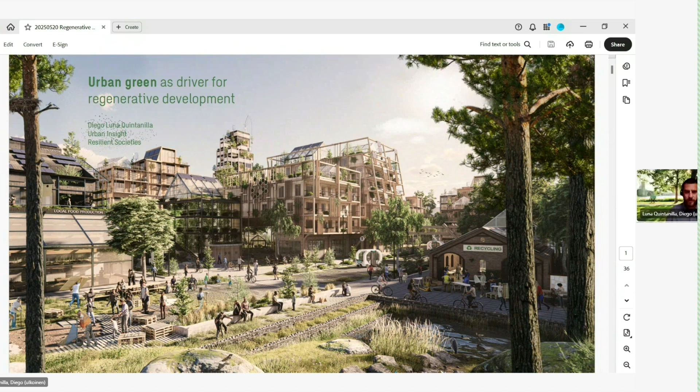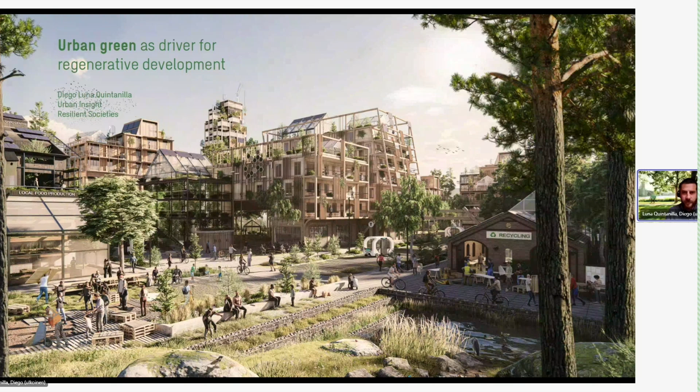Hello, thank you very much for the presentation and for the invitation. I hope that you can hear me all well. So indeed, I'm going to talk today about the role of urban green within the whole concept of regenerative development. I will switch to my presentation, just give me a second. And here I am. Can you please confirm that everything's on screen? Yeah, I guess so, so I'll start then.

I was, for the last 2 years until January, leading together with other colleagues the initiative of Sweco Group called Urban Insight, our knowledge development platform focused on the topic of resilient societies. Within this mission of 2 years, we created a lot of material, articles and reports. The focus of today's presentation is on one report we published in December last year, called Regenerative Neighborhoods: Where People and Nature Flourish.

This was co-written with my colleagues Tobias, Lisbeth, Ragnar, and myself, with the help of many experts from all over the Sweco countries. It was a very interesting production because for the first time we tried to put together a lot of disciplines within Sweco to discuss the topic of regenerative development, a notion that is getting some traction within our field of work.

But why did we decide to deal with regenerative development as a concept? It's because when we look at the different crises we're living through, we see that ecosystem collapse is one of the most pressing crises we have. When you look at the current state of ecosystems in the world, you see that there are over 39 or 40 countries with very fragile states of their ecosystems.

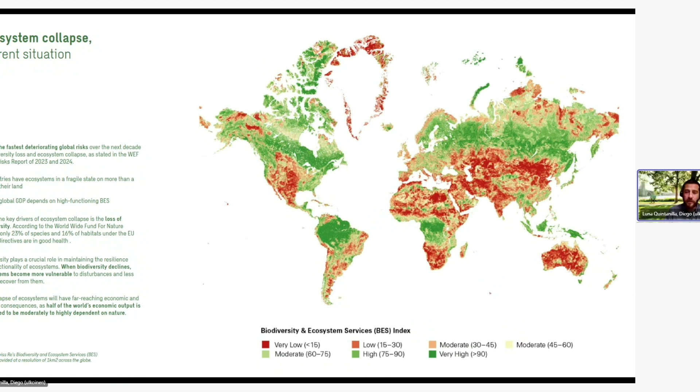Which means we cannot respond to one crisis without looking at other crises that are part of the problem, but we also cannot think about solutions that will not have impact on other things. It's actually an interconnected network or complex network of crises, which means everything we do to solve one of these crises can never be done in isolation.

We always need to think about a systemic approach in which the planning of cities, the planning of projects or built environment, should be looked at in a holistic, multidisciplinary way. We cannot think about developing a neighborhood based only on social dynamics—we need to think about environmental dynamics, waste streams, energy, water, all together. That's what composes our built environment. We need to look in an integrated, systemic way.

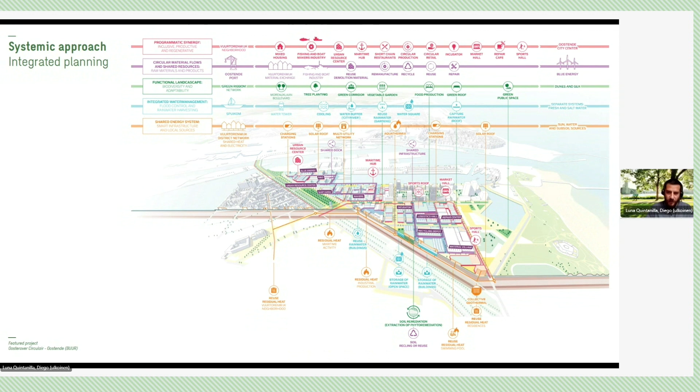Another thing is that we need to provide the support our society needs to change its behavior. Everything is part of a bigger societal transition, and we need, as a society, to be able to change our behavior, but we cannot do that alone. We need to work together, and our built environment needs to support this societal change. We need to upgrade, reinvent, and regenerate the spaces of daily life so they can support these wider transitions.

We need to be able to create new types of urban facilities that will help us, for example, grow our food in our neighborhoods, or create productive devices so we can be part of a wider circular transition. We need spaces for social interaction, for capacity building, and so on.

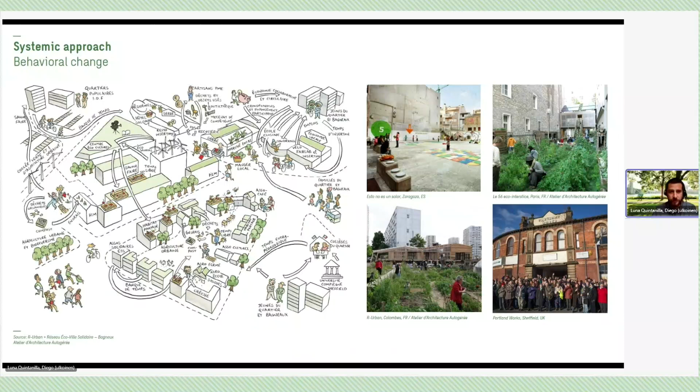And that's why the holistic view is very important, that we are able to not work in silos, but to work in a larger picture. And for that, we also need consensus on this. So there are certain global frameworks that help actually to look at things in an integrated way. The One Health approach, for instance, is one framework which sees human health, environmental health, and animal health as being one health, one approach. These type of references help us to look at the whole picture.

But this also links to the whole idea of regenerative development. In general, this regenerative design approach views cities not in isolation, but as part of a larger ecological whole. In that sense, in regenerative neighborhoods, natural and social systems are integrated as equal partners. So the concept of regenerative development encourages cities to move beyond being only neutral to actively regenerating natural systems and enhancing human well-being.

So when we look at the transition, a lot of things that we do within sustainable development in general are part of this wider transition. But we also need to understand what's the impact and what's the role of the projects we do within this wider transition.

We're talking about a path that goes from doing less damage to actually giving back to our environment, and that has several stages. We have the conventional design, which has little or no consideration of the impact on the environment. We have greener design, which are projects interested in creating less impact. However, they're not fundamentally changing the way they're developed. They're not changing any models, just trying to minimize the impact, but still within the conventional way of doing projects.

We have a neutral design, or sustainable design, let's say, which does its best to cause no harm, zero impact on the environment. That's very interesting, but it's not the holy grail. It's not what we should be aiming for, because we have destroyed so much already within human history that having neutral impact is not enough.

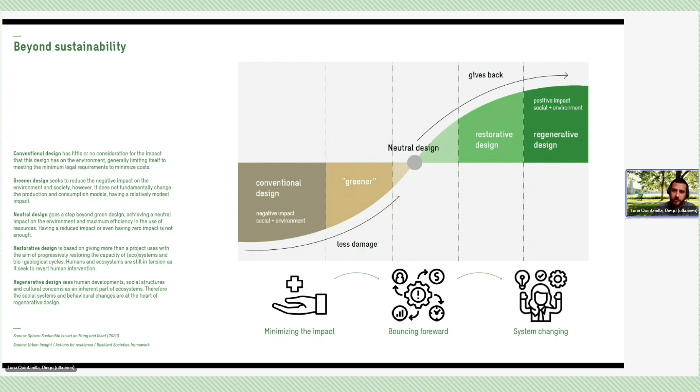We actually need to go beyond that. We need to start restoring the ecosystems and their capacities. And we need to go even one step further, thinking about the development of society and nature as one system that works together. That is the regenerative design.

And this is something that is already happening within the context in which we work. Policies and environmental agendas are slowly pushing in that direction. The most recent policy, from last year, is the EU nature restoration law, which fixed targets for Europe to restore ecosystems in many ways. This is the context in which we should consider our projects, and it creates a lot of opportunities within our current practice.

Within the study I was telling you about before, we wanted to check, okay, what's the current state? If we want to achieve this regenerative development, if we want to implement the nature restoration law, we need to understand where we're sitting now as European cities—what's the current state of the urban green-blue infrastructure, and how can that help?

We realized that Europe, in terms of statistics, is projected to grow in population until next year, 2026, which will statistically be the peak. Then the population will slowly decrease over the next 25 years. However, when you look at the trends in distribution of population, even though the population will decrease, a lot of people will start moving to cities, so cities will keep on growing.

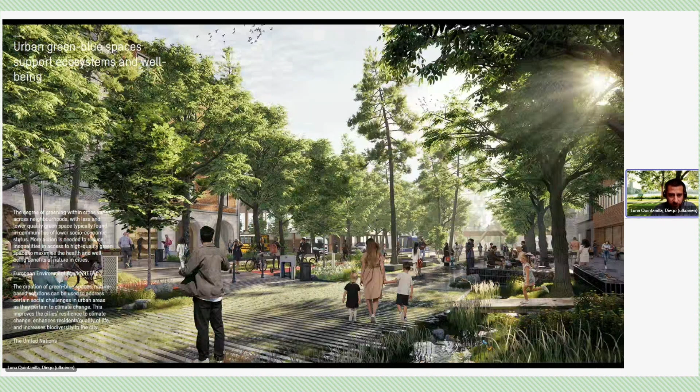So the question is, how can we keep growing, or face that challenge, without compromising our open spaces and urban ecosystems? That's where we want to see urban green spaces not as spaces to be filled up with urbanization, but actually as the drivers for urbanization.

In the present, we're looking at infrastructure like for cars or public transport as the drivers for development. We need to go one step further and look at ecosystems as those drivers for development, and think of cities built to reinforce ecosystems.

That's where we did this analysis on 22 European cities to understand the potential they still have to increase green-blue areas. This was done using European datasets, specifically a Copernicus database from the European Union.

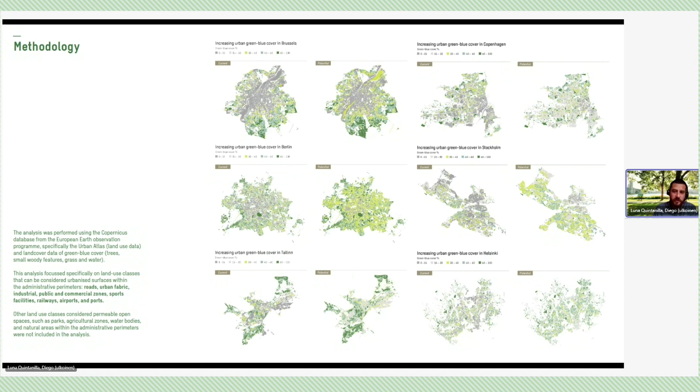From these 22 European cities, we took only the land use classes already considered urbanized, excluding anything already green or open like agricultural land, parks, or water bodies. We concentrated on roads, urban fabric, industrial fabric, public and commercial zones, sport facilities, railways, airports, and ports, trying to measure the current state of green within that built environment.

It is about potentials, but to understand the impact, we summarized all this increased green into some figures. The most important one: all 22 cities combined could integrate within their built environment around 56,000 extra hectares of green. That's equivalent to 7 times the Port of Rotterdam, 400 times Hyde Park in London, or 500 times the center of Tallinn.

When we look at different land uses—industrial, roads, etc.—we see that industrial land has the most potential to increase green without compromising its productive capacity. So we see both the enormous potential cities have to include green, and which types of zones have more potential to incorporate it.

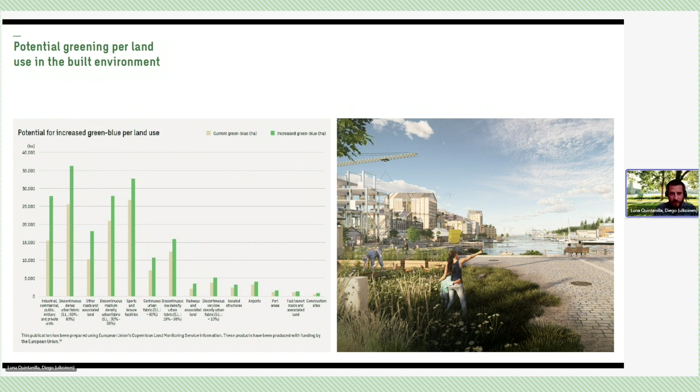Some numbers to give an idea: these 56,000 hectares are equivalent to increasing from 23% to 50% the share of neighborhoods that have at least 30% green coverage, which is what's recommended by the World Health Organization.

There's another interesting figure: this amount of green can buffer 160 million cubic meters of water. It can also create a 200% improvement in urban habitat for biodiversity. So in general, increasing green in urban environments creates a lot of benefits.

This is summarized in another report we published in Urban Insight last year, From Grey to Green, about nature-based solutions. There we see that increasing green is good for social cohesion, water management, carbon storage, saving energy, reducing heat in cities, biodiversity, mental and physical health, air quality, and the economy—it's good for making societies thrive.

The question is: we saw the potential in this study, but it's a statistical potential. The challenge is how to make it happen. It's not easy to transform something built into something unbuilt or green. However, there are certain types of urban operations that could help transform built environment into more green environment, looking back at the nature restoration law, specifically target number 8, addressing urban ecosystems.

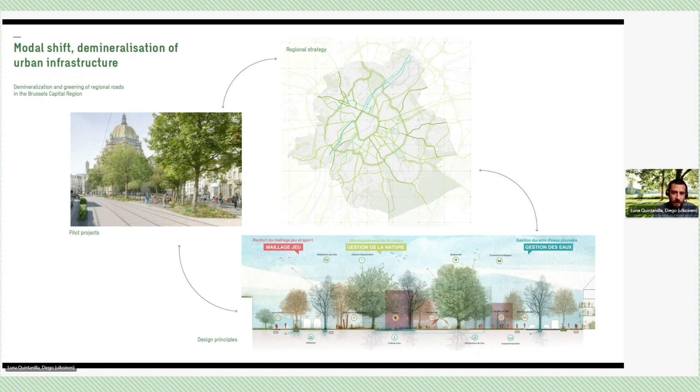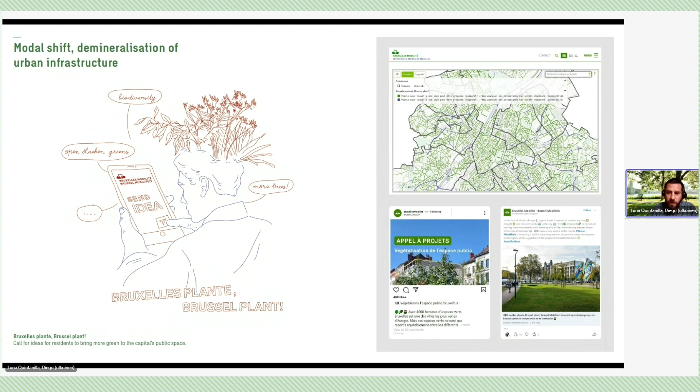In parallel, the region, with our support, launched a bottom-up initiative to incorporate citizens within this reflection. They made a call for projects where citizens could postulate or send ideas about how to demineralize or make greener their local streets where they live their daily life. That was a very interesting project with a lot of input and participation—people start to embrace and engage with this trend from the bottom.

A third way we can increase green within cities is by incorporating green in buildings. There are a lot of opportunities with buildings already built, especially big office or commercial buildings built in the 70s and 80s that today really need renovation, because they need to upgrade their techniques and maybe think about new programs. This is an opportunity to incorporate green within buildings.

This example is a proposal we did for the reconversion of twin towers in Brussels. It's about making these monolithic buildings into mixed use—one tower transformed into housing, the other into offices—but especially integrating green everywhere in the building at many levels, not only to increase scenic quality, but also as a technical device to regulate temperature and catch and manage rainwater.

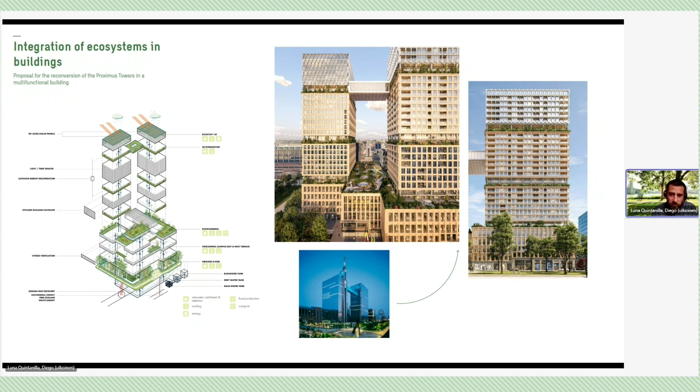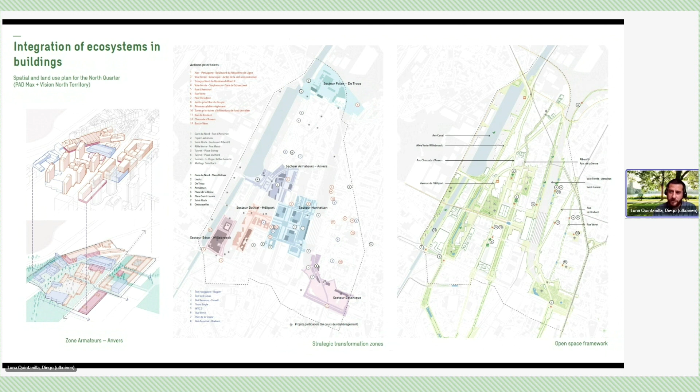This project we're doing is more the planning of the whole district. We identified transformation areas that today may need renovation, but are also very heterogeneous, with a lot of different volumes colliding with each other. By working carefully on the renovation of these sectors and including landscape and green as an important part of the design, we'll be able to configure a network, an armature or framework for the whole neighborhood that will help increase its quality and environmental performance.

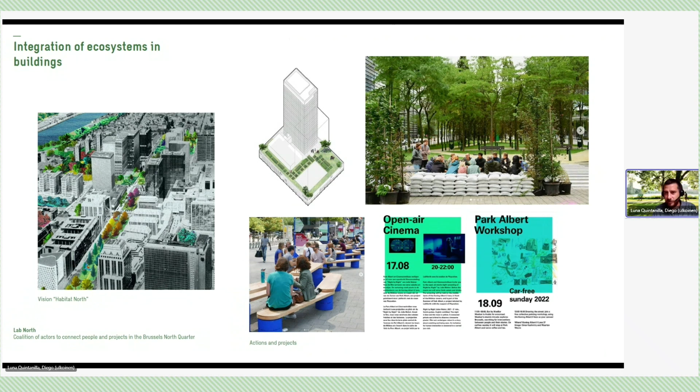In parallel, many initiatives are happening in the same neighborhood, knowing that this is a neighborhood in transformation. So buildings are transforming, but also people are trying to get aware of what is happening. A lot of initiatives are popping up, creating panel discussions on the streets, but also neighborhood activities and placemaking activities that help ensure this transition of places is done not only by the real estate market or government, but also by the people and residents living and using these spaces.

Last but not least, another important way to integrate green in cities is by having big renovation plans. That happens quite often. It's quite a trend to renovate old industrial sites within cities. In Brussels this is also a trend, but it's a challenge because we don't want to gentrify industrial areas. We want to make them still productive. However, we understand they also have the capacity to integrate other functions - productive functions, but also housing, since there is big housing demand, and also green and water features.

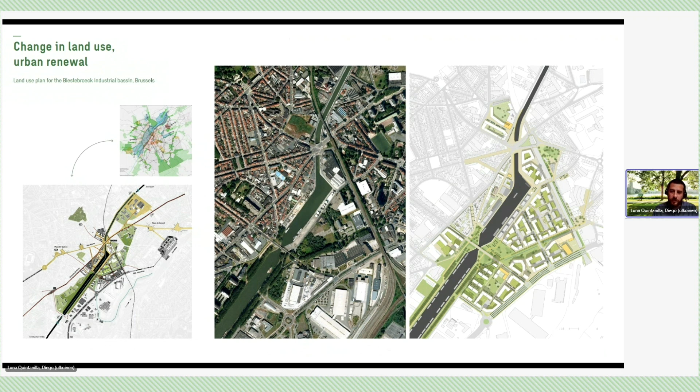Here is the example of one area in the center of Brussels. It is an industrial area, but not the most performant one - let's say it is half abandoned and still in transformation. Our plan is to make it a place able to link the two neighborhoods on the left and right, which are vulnerable neighborhoods, and try to integrate them through a network of public spaces and green spaces, but also by creating some mixity and critical mass of residents living, working, and having neighborhood facilities within the spaces.

To conclude my presentation, I would like to sum up the challenges, barriers, and enablers to shifting toward this regenerative agenda. It is a difficult task - it is not easy to implement those projects, and here are some of the challenges we have seen. On one hand, the complexity and non-linearity: a shift in system thinking requires moving beyond narrow linear problem solving to understand the world as a complex, interconnected ecology, something I stated strongly at the beginning. We need to adopt a planet-centric approach, prioritizing the health of the planet and ecosystem rather than only human prosperity - something that has to be done in a well-balanced way.